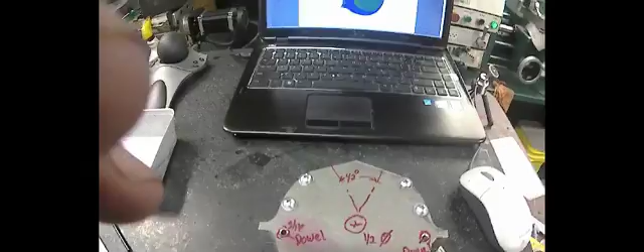Alright, I ordered some wire for my coil winder and I'm waiting for all of it to show up. So I just put it on the shelf, and I'm going to take a break from that. I started working on my Hoglet engine that I redesigned. This is hopefully what it's going to look like. I got it on a 3D PDF here.

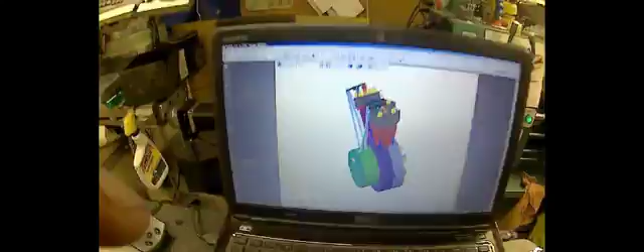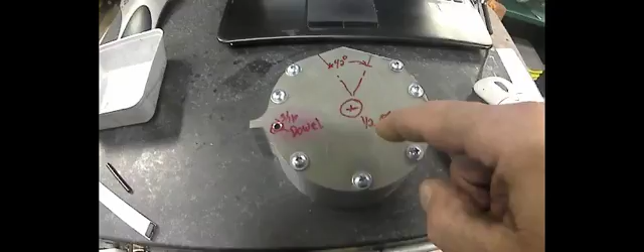I don't remember how to hide the pieces so you can look inside, but anyway, I got two halves of the lower end case roughed out, and I've got two 3/16 dowel holes roughed in. That'll be the alignment dowels, and I'm going to set up and bore the 1/2 inch hole through. That'll be for the crank.

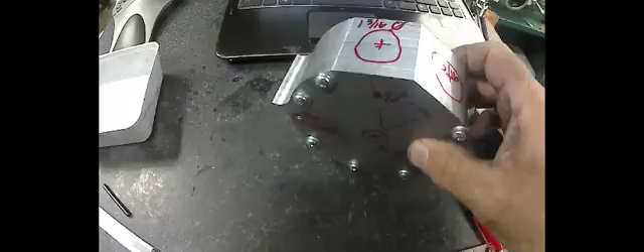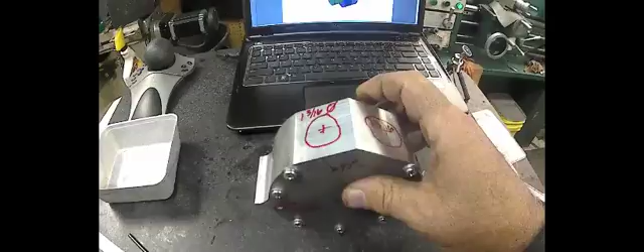Then I'll end up clamping it to a knee and finishing where the cylinders are going to sit. They're going to be at 45 degrees, just like the Hoglet. I'll have to take a cleanup cut on this side and this side both. There's a little bit of mismatch between the two when I machined them. But anyway, that's what I'm doing today, just messing around, working on this.

Like I say, the coil winder, I'm waiting for some stuff, and plus I ordered some more electronic stuff for the buzz coil and some other things. So that's going to be sitting for a while. I'm going to work on this engine now instead. I worked on it over the summer, redesigning it and getting it the way I wanted it to look, and so now I'm going to try to build it. So that's what I'm doing today.

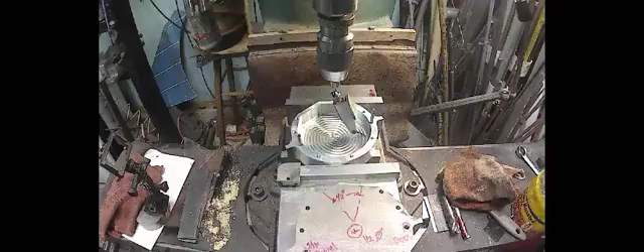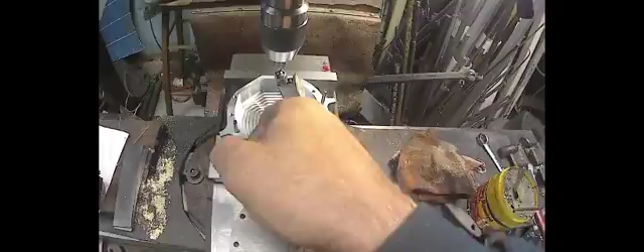Okay, I dialed in the inside of the case, and then I wanted to double check that my spindle is 90 degrees to the inside of the case, actually even the outside. I wanted the holes to be perpendicular, so that when I put the other side of the lower end on and bore through here, they're in a straight line.

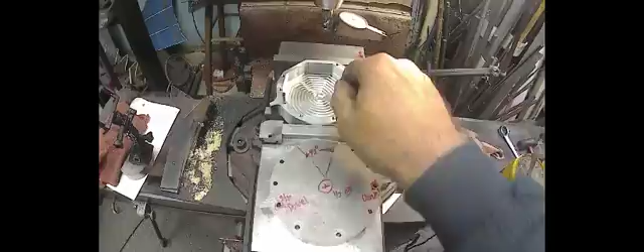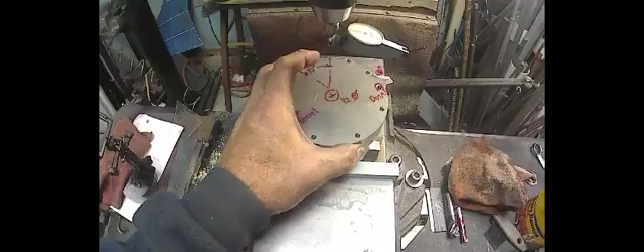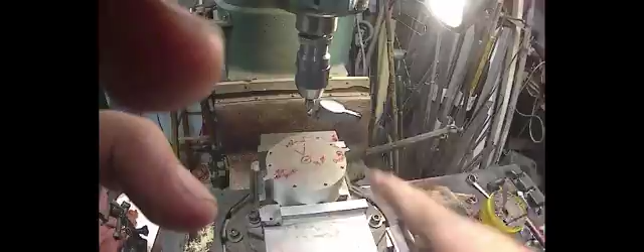So now I'm ready to put the hole in on this half, and once I do that, I'll bore that hole for the crank bushing, put this on top, line up the dowels, bolt that down, and then bore through there. That's the plan anyway. So I'm going to go ahead and drill and bore that hole.

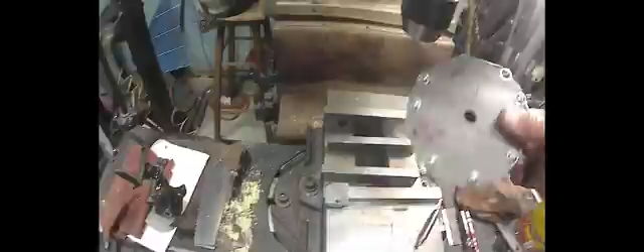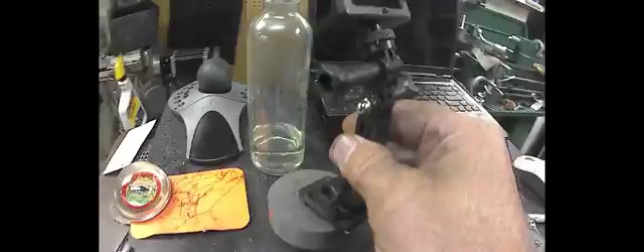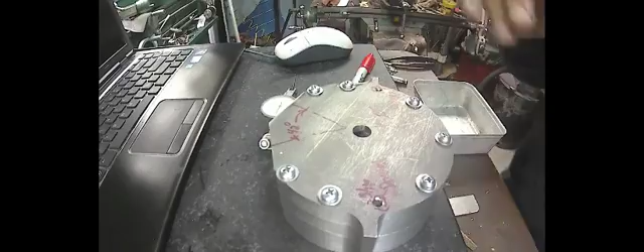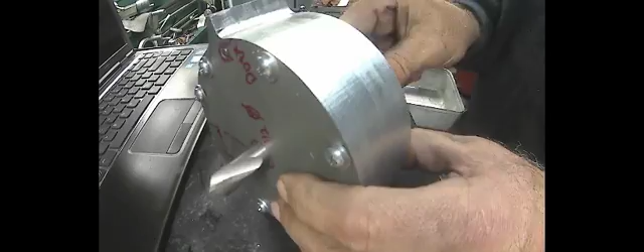Okay, got both of the holes bored through, so I can take it out. Go over here to the surface plate, get my little tripod here, and put you in. Do I have anything that's 1/2 inch? That one, yes. It's a 1/2 inch spot drill, and it slides right on through, just like I want. No slop.

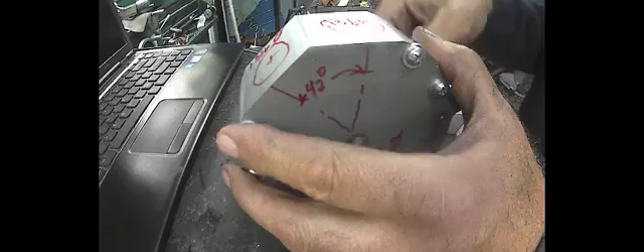So actually, I'm not going to take it apart. I'm going to go ahead and set it up, set this up, swing in the center of the pin and bore that. It's a 1 3/16 diameter through the top, and then 42 degrees over, and do the same thing on that side.

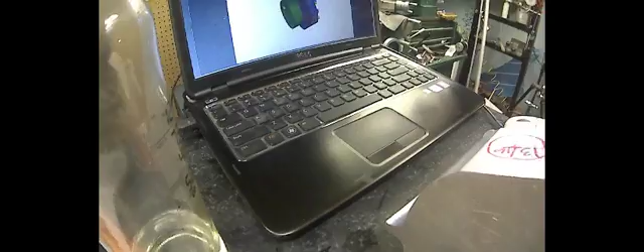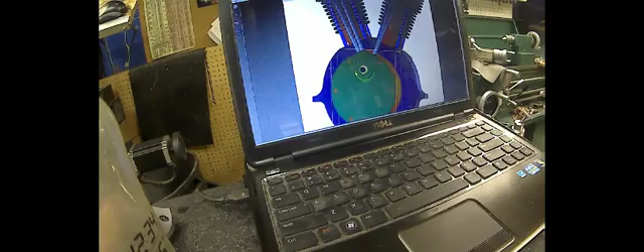Then flip it around, dial that in, and there's a hole pattern in the back side here for mounting the cam box, because I'll have a cam box on it. Look here on the screen, it's right here. I'm not used to 3D PDFs, but basically this block gets mounted, and it has a hole pattern. I can't remember what the hole pattern was underneath. Wish I could remember how to hide a part. Not proficient on 3D PDF in Adobe.

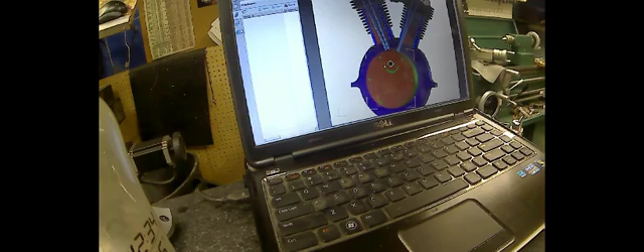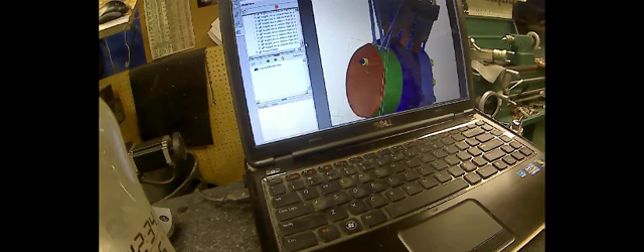Yeah, there's the parts. Does it highlight the one that I pick? I think so. Ah, yes. Well, that's not, I want to hide the top here. That one. So, where's that one at? Oh, right there. That one, I'll bet. Yep. So there's what the cam box looks like underneath.

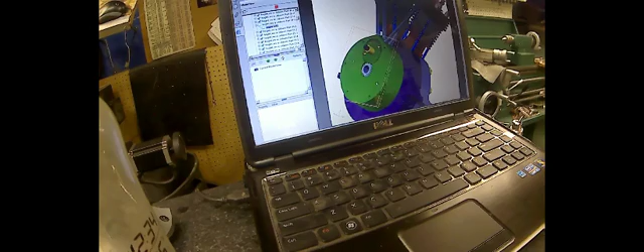And it'll have this hole pattern in. I should probably make that first before I put the hole pattern in over here. That way I can put it on the shaft and line up the flats with the cylinders, the cylinder flats, and then put the hole pattern in. That way everything's clocked correctly.

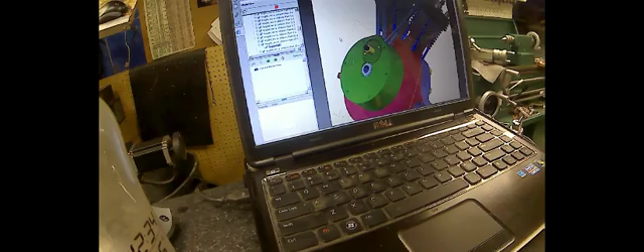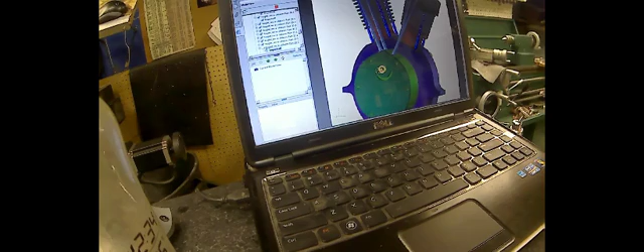It's been a while since I looked at this thing. Oh yeah, then the Hall effect sensor and stuff will go right here, mount on that, and then move back. I'll be able to set my timing and stuff. Oops. So, yep. And there's the two magnets. So, anyway, that's where I'm at.

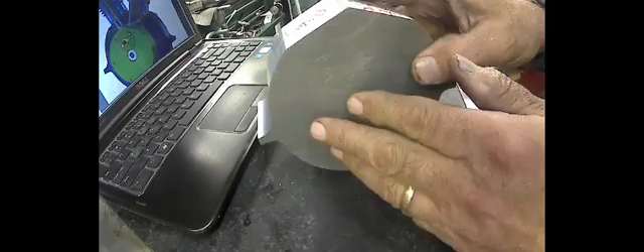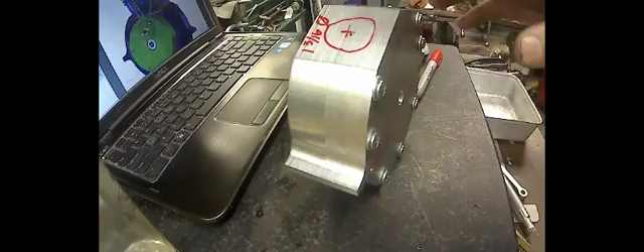Gonna go ahead and set up a knee on my mill. I got to deburr it first. Set up a knee and get it set up for the hole up on top for the cylinder. I'll get started on the very first cylinder hole. So I'll go pull the vise off and set that up. Maybe I can do it on the end of the mill, on the end of the table. So I'm going to go ahead and work on setting that up.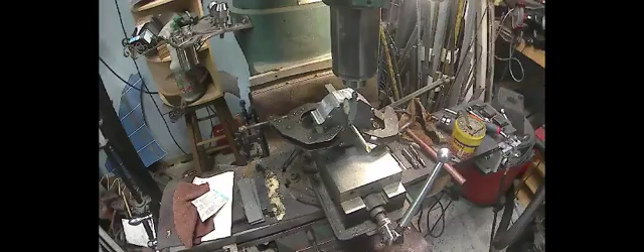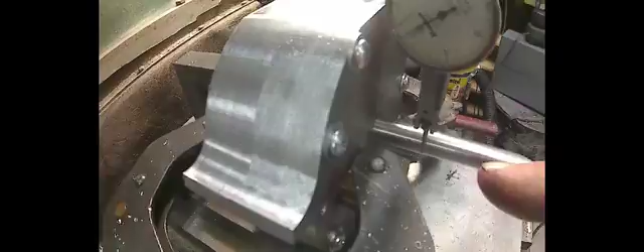Okay, I didn't take the vise off. I just clamped my knee in the vise and clamped it on face and dialing it in. I dialed in the flat across and then took a nice little cleanup cut on it. And now I'm dialing in the center line of the crank, and I got the indicator on the shank there. Let's turn the light off over here.

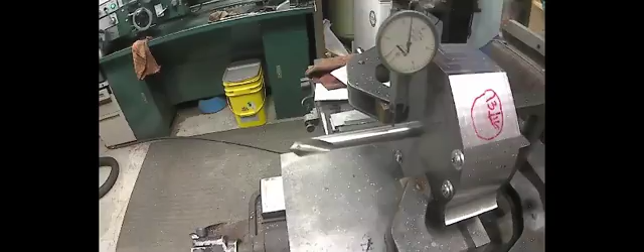And so I've got it there, and then on the high side, I got it on the high side of the pin. So we're just about a half a thou above, right there. So then we'll come around to the other side without touching the indicator. And get it kind of situated here. Try to loosen the brake and pull the handle down on the quill with one hand here.

Okay. Right about there. So, looks like we're about a half a thou from being exactly on center, so I'm going to call that good. I'm going to call that good right there.

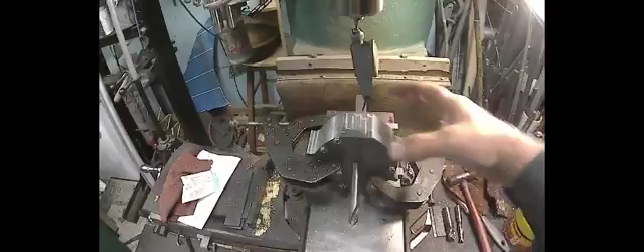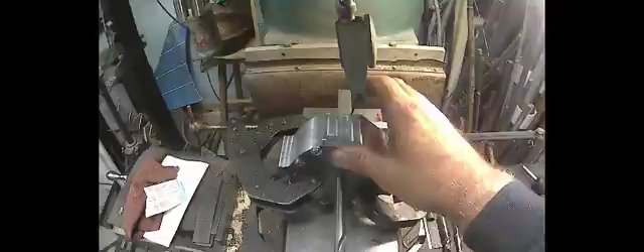So now what I need to do is swing in so I can get it on the center of the two. I'm going to deburr this edge because I feel there's a little tiny burr on there. I'll grab a burr quick here and just... There, that's better. So now we want to pick up the center this way. Oh, I'll crank this out. I'm going to set you down here while I crank that out.

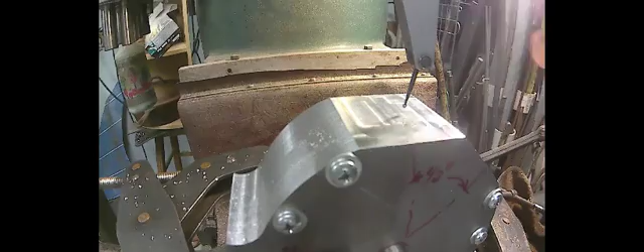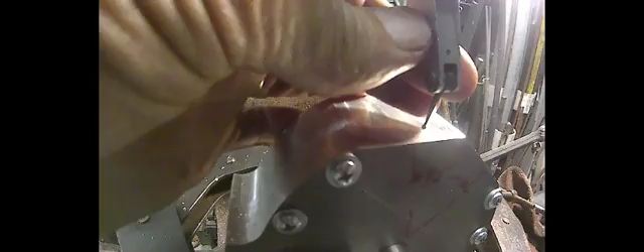I just kind of eyeball it. I know that was on the high spot of that pin where it's sitting right now. So if I put that on the seam here or damn close, it should be pretty close. Right about there. Alright, so now we'll swing the indicator around. Get the needle situated. And let's see, you're not going to be able to see the indicator, are you?

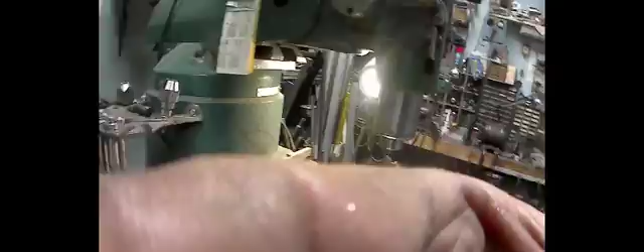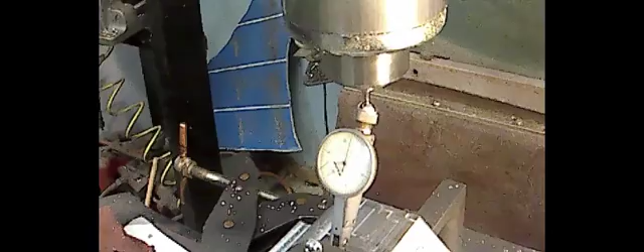So let's see if I can put you on a taller tripod here. And now it's too tall, so we'll lower you down. And kind of far away now, really. Let's see if I can get you a little bit. The zoom doesn't work really well on this camera, so I'll try to zoom in, but the zoom doesn't work all that well. That's about it right there for the zoom. Actually, you can see it better that way.

Alright, so I'm just going to push the indicator in and swing it back and forth and get a zero reading. Right there. Alright, we're right on zero there. And let's swing it around. Looks like I'm off. Looks like I wasn't looking at the seam. So we'll try it again.

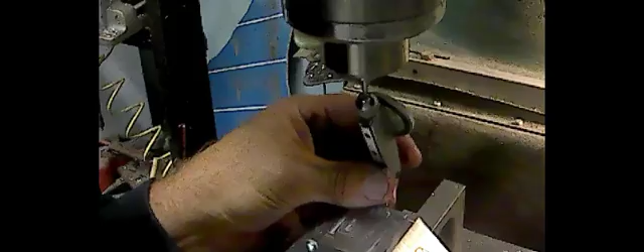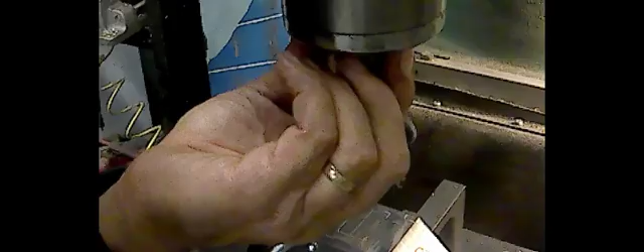Bring it down. Get it in there, touch. Find the zero. Pick up that surface. Okay, so that's zero there. Swing it around. Buckling my indicator. I'm still a little too far off. Keep going back and forth until I get it right. Find the surface as zero. Straight across.

Alright, looks like about 5 thou off. Zero here. Zero right there. Swing it around. Not touching. There you go. A little bit. I'll get there. Take some practice. I haven't done this in a while, I guess. Apparently. Eyes kind of failed me there. Alright. Okay, I got zero back here.

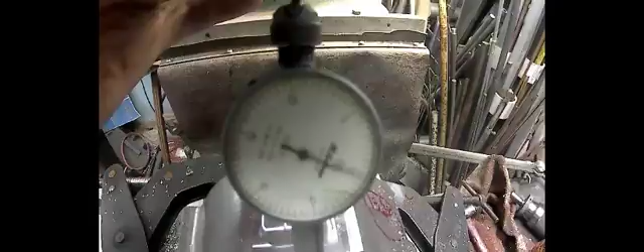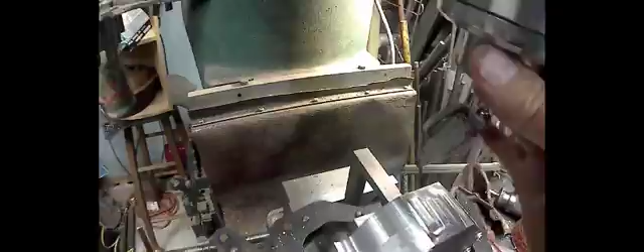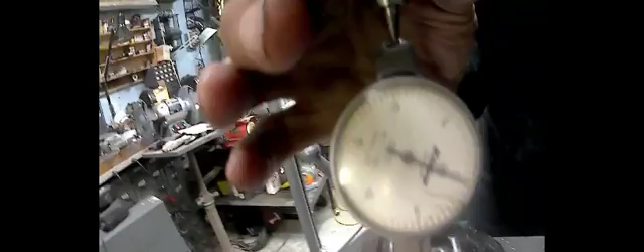Okay, there's zero. Oh yeah, and there's zero there. I'll show you. Up here. Let's reset the zoom back if I can. But there's a zero right there. Now we'll move up, swing it around to the back, and then try to... not cooperating here. Okay, back on the surface, and what do we got? Damn close to zero there, within a couple tenths. So that's on center line of the shaft and the center line of the tube, so it's ready to bore the hole in it.

So I will start out with probably just a 1/2 inch spot drill. So it's got a 1/2 inch collet in there. It's got to go to 1 3/16 inches diameter. So since I got a 1/2 inch spot drill right there, we'll stick that in the collet. And we'll go. Okay, I'm going to go to low range. Get my light out of the way of the handle here. Take this handle off the vise so I don't inadvertently loosen the vise up. I've done that before. I had everything dialed in and then loosen the vise up and go, oh shoot.

We're just going to poke this. Hopefully I'm just going to poke this spot drill right on through. Carefully. There we go. And I think I have an inch drill, maybe. I know I had a couple big drills. Well, I got a 13/16 here. I don't have many of these drills anymore. Kind of gave them all up. They come in handy so you don't have to do so much boring, if they cut decent.

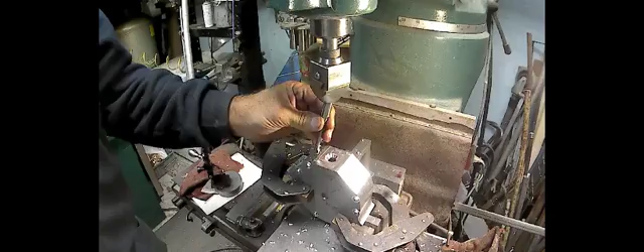Let's see if I can find a boring bar. I made a lot of boring bars already. Seems like every time I work on something, I make another boring bar. These here are bought. I don't know if I can get that in there without... I don't want to move the table. This one. All right, we'll go with that one. Moving your knee up and down too, you can lose your settings unless you know for sure that your ways are absolutely parallel to the spindle. It's not a jig bore, so guess what? They're not. I mean, they are damn close, but they're not 100% parallel.

Wrong. And turn this around to there. Get that point, right orientation. And I don't want to take that big a cut, so we'll back her off. And we'll start right there. And set my feed to 1. And make sure I'm in gear. Yep. All right. That's a little fast for that boring head. I'm gonna slow the RPMs down.

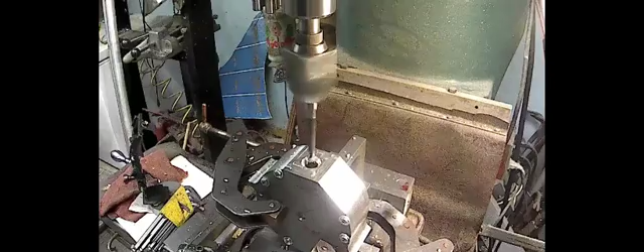Ooh, I didn't like that. Why did it do that to me? This boring bar must be a little dull or something. Ease off, just go only half of that. And I do have it on the slowest speed.

Yeah, I dropped the ring down that time, because what happened was the ring popped up there and caught on the boring bar. So we'll go just 25 thou on each cut here. That's actually 50 thou in the diameter.

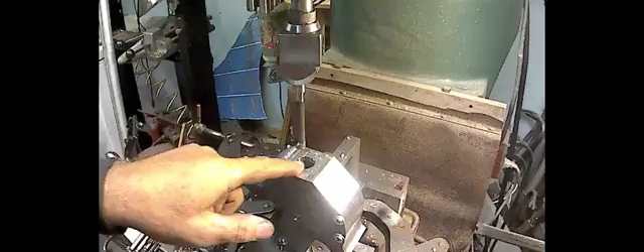I think it just cleaned up the 13/16. We're at, yeah, we're at 812 right now. 862.

This is high quality aircraft aluminum. I don't know how many times I hear that on TV and I laugh all the time. It's 7075 T651.

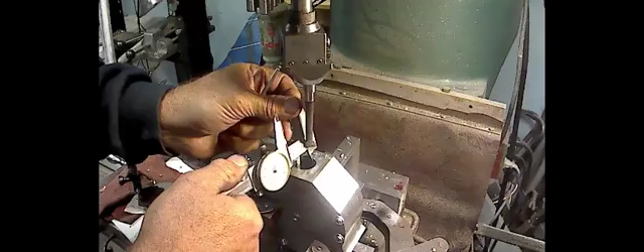Let's see, that would be 9, yeah, I gotta go 187 beyond an inch. This isn't real critical as long as I get close, because I'm going to make the cylinder sleeve, the cylinder that fits in there, so whatever I end up with, that's what I'll make it. That's one of the things I like about this stuff, you can fudge a number and make it up somewhere else.

Where I work, you couldn't do that. There's a lot of stuff that you had to have that half thou, and sometimes they tried to go 2/10, but yeah, right.

Cat's driving me nuts.

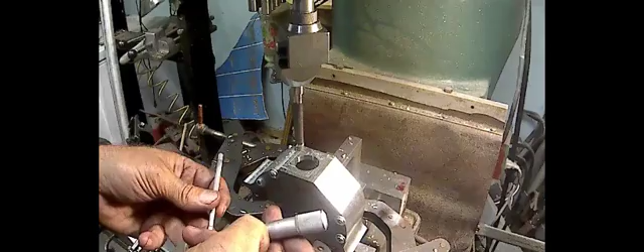Okay, I am gonna go check it now with a snap gauge. Snap gauge out. Okay, got a snap gauge here, and we'll try to get a reading. All right, get my 1 to 2 mic. I don't think I've had my 1 to 2 mic out in several years. Should be about 1.050, I think. Actually, 1.065 is where I'm at. 1.065.

And I'm going to go to an even number this time. I'm going to go all the way around to the 0 and then check again. That way I can adjust from there. Alright, now we'll take another reading. It should be pretty close to 75 now. About 110 to go.

These thin walls, or thin areas like this, are sometimes hard to get a decent reading because it wants to slip off on you, slip in the hole, because you got to get it off-center and then drag it through. Yeah, I did it right the first time. I think I got it that time. We're actually 1.100. So I'm going to go 50. And that should give me about a 30 thou cut for finish.

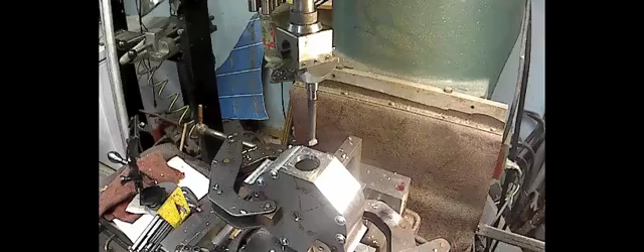A little bit of chatter, but that's not that bad. And check it again, just to make sure. Like I say though, this is really not critical because I'm going to be making the mating part and I'll make it whatever. It is 1.151. 36 thou. So we'll just go take the whole amount. 10, 20, 35, 36. And that should be good enough. Good enough.

Okay, so now we got to put the hole pattern in around it. I'm thinking about making a jig for it, just a jig with a plug that I can put it on and drill the holes. Matter of fact, I think I'm just going to think about it overnight. I'm going to stop for today and call it good. Leave it where it's sitting.